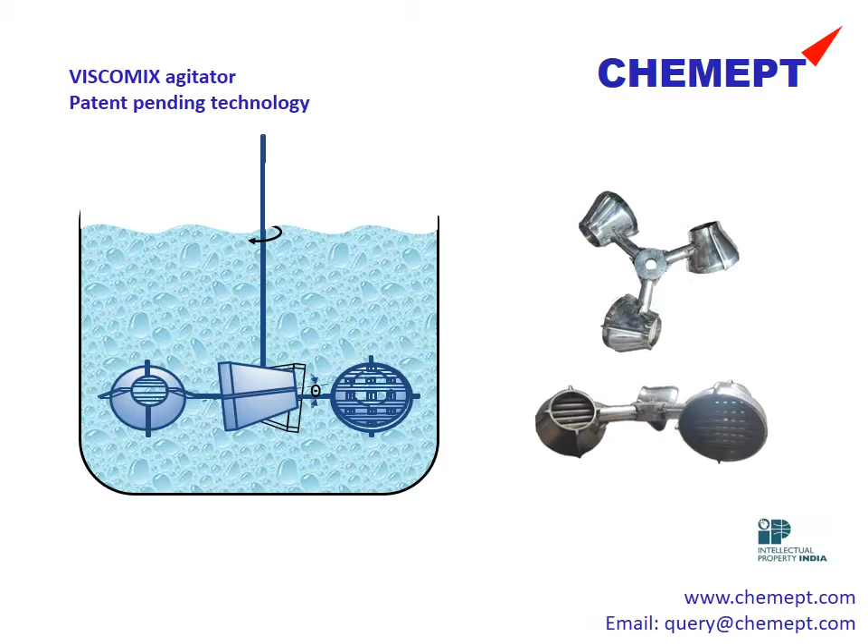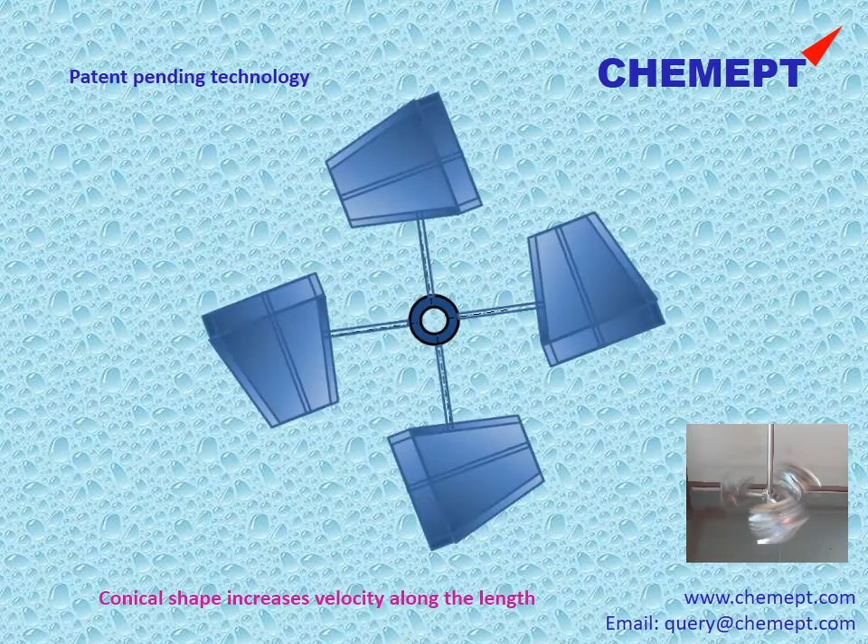The present invention provides an agitator for use on an agitator shaft having an axis of rotation. The agitator device has a plurality of conical configurations so as to hold a plurality of baffles radially with respect to the axis of conical configuration. The axis of conical configuration is tangential to the axis of rotation and inclined at an acute angle relative to the plane of rotation.

The conical configuration is oriented such that mixing materials enter and flow from the larger diameter toward the small diameter and exit from the small diameter. The conical configuration has a plurality of external baffles arranged longitudinally. These external baffles generate distributive mixing by turbulent flow patterns.

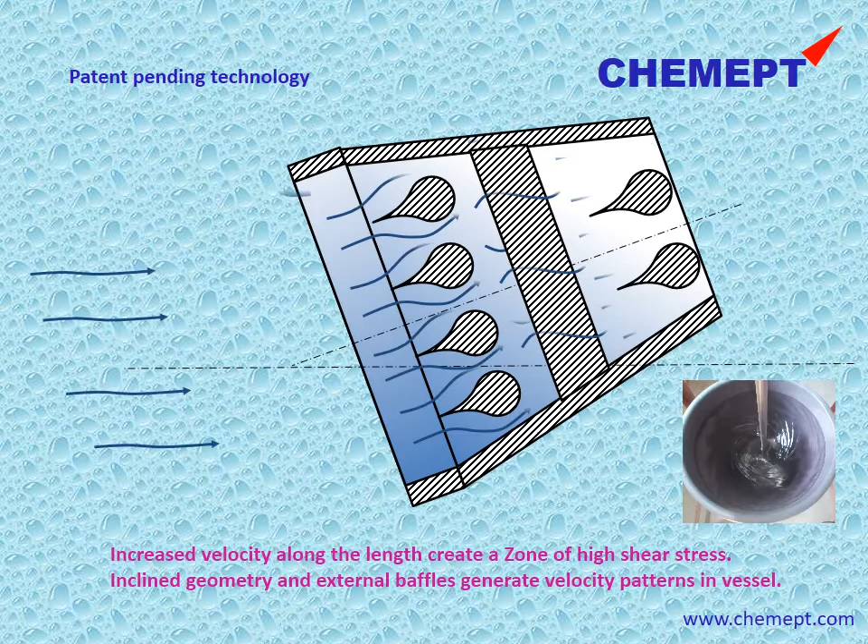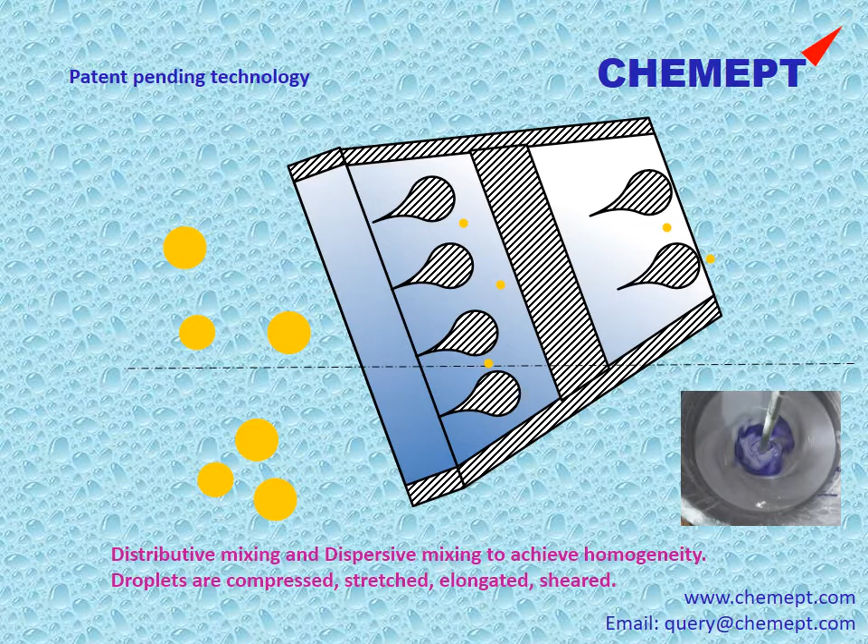The baffles are teardrop shaped and are arranged so that multiple baffles are generally parallel and adjacent to one another. The position and dimensions of the various baffles will vary slightly depending on the materials being mixed and corresponding stresses required to achieve adequate dispersion of materials.

Rotation of the agitator inside the mixing vessel helps inclusion and flow of mixing material from the larger diameter of the conical configuration toward the smaller diameter and exit from the smaller diameter. The baffles are oriented such that the mixing material flows from the small tail portion of the baffles toward the larger head portion of the baffles, thereby encountering a gradual compressive force and corresponding elongation.

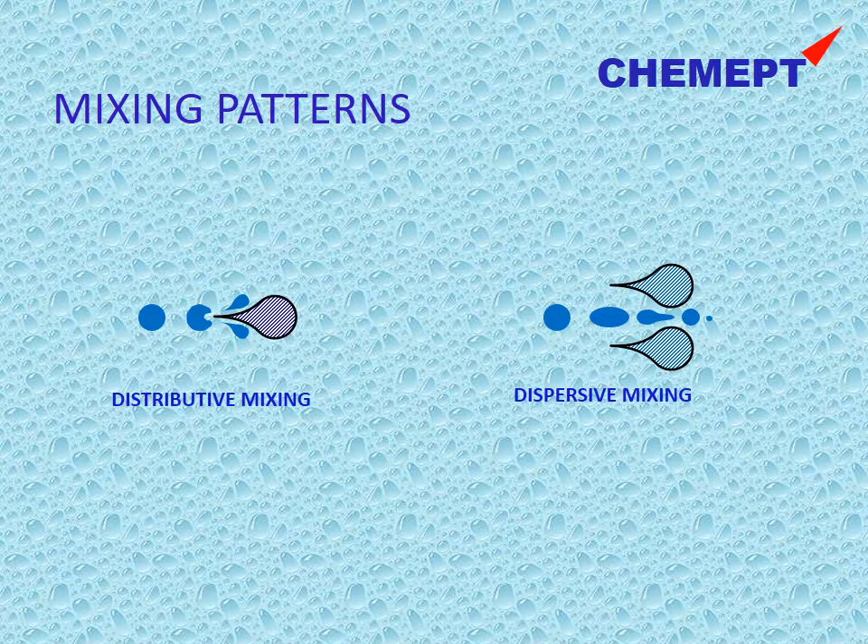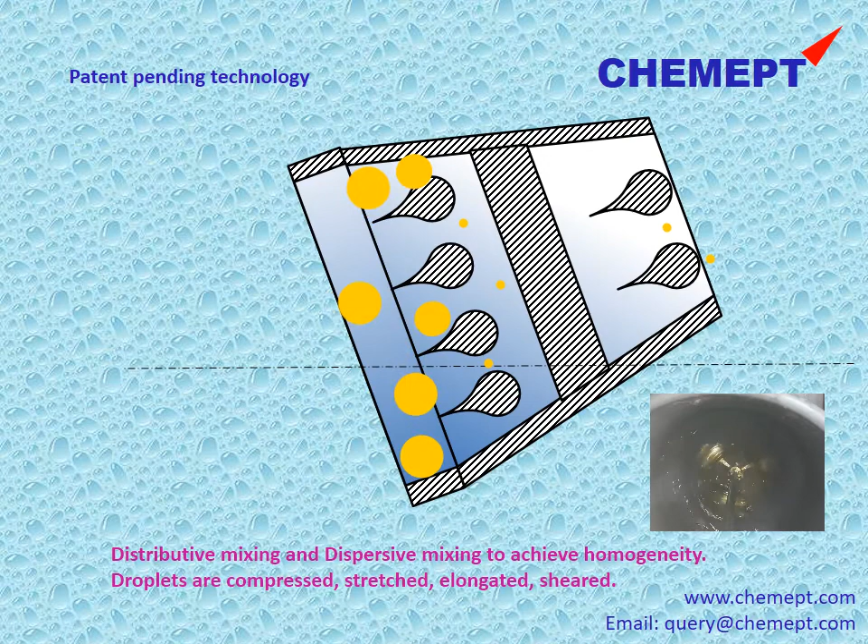The ViscoMix agitator generates distributive mixing and dispersive mixing to achieve homogeneity. In dispersive mixing, solid agglomerates or liquid droplets held together by interfacial tension are exposed to mechanical stress in order to reduce their length scale. The applied stress can either be shear stress or elongational stress. In general, elongational stress is more efficient in achieving dispersion than is shear stress.

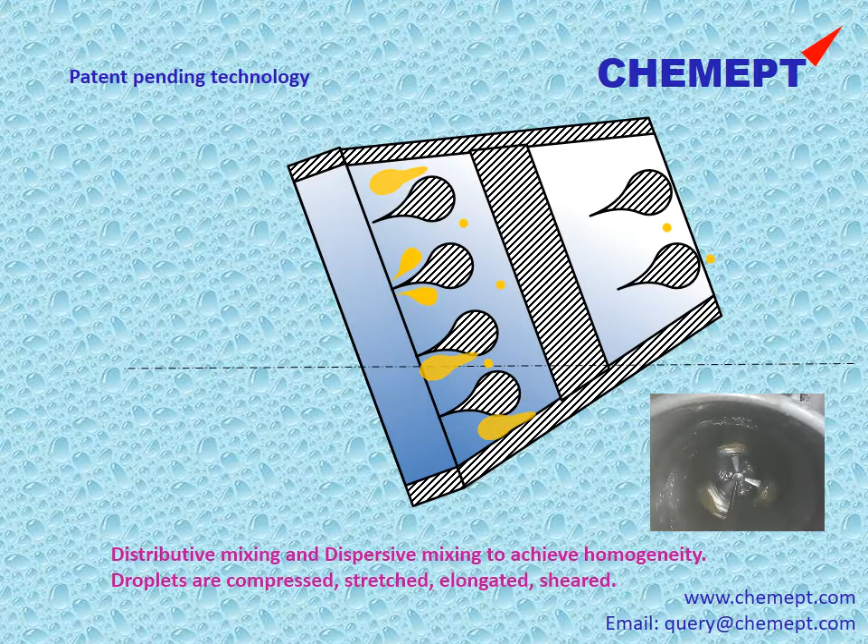The amount of stress required to break up the agglomerates depends on the size and shape of the agglomerates and the nature of the bonds holding the agglomerates together. Here, droplets or solid particles travel along the axis of the conical configuration. They are compressed, stretched and elongated to generate a high shear force and eventually break down into smaller particles or droplets to achieve the desired homogeneity.

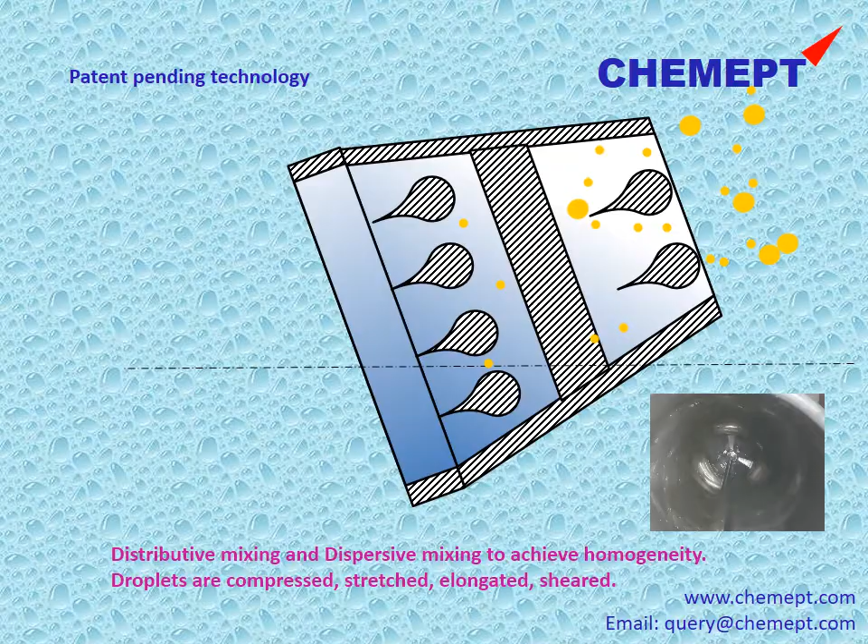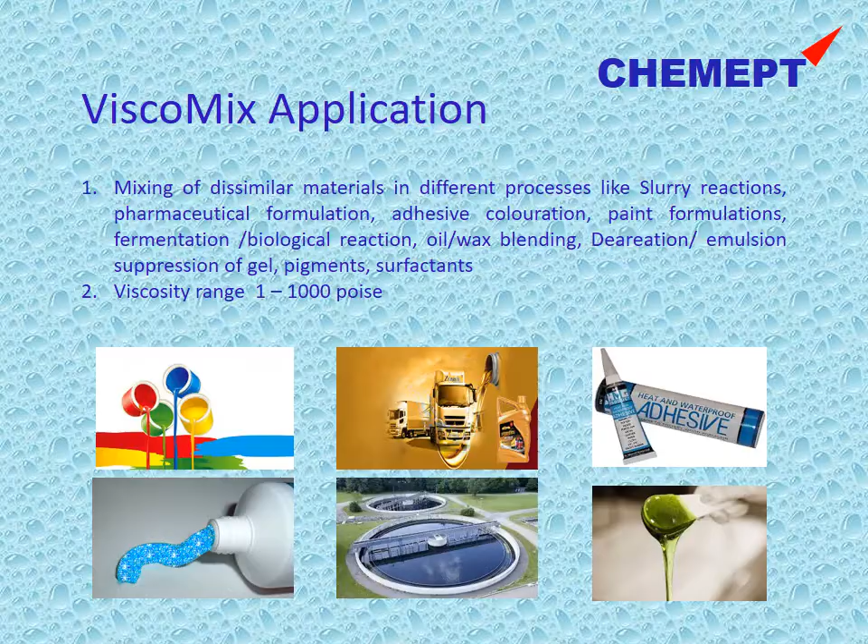Different installation configurations are available for the ViscoMix agitator. Typical applications of the ViscoMix agitator are mixing of dissimilar materials in different processes like slurry reactions, pharmaceutical formulations, adhesive colorations, paint formulations, fermentation or biological reactions, oil or wax blendings, deaeration, or emulsion suppression of gel, pigments, or surfactants.